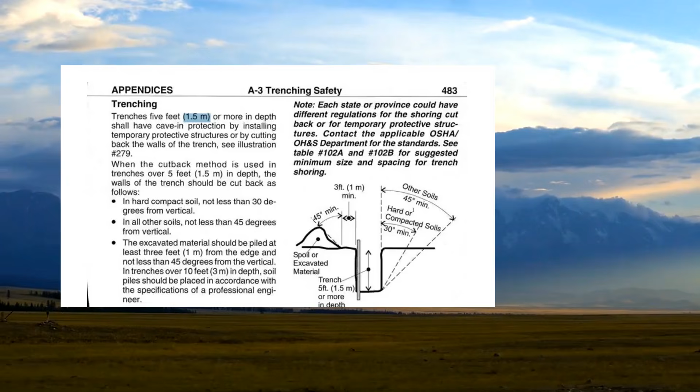Now this isn't exactly accurate. The numbers you need to remember, just like with the ladders, it's 1/4 the height. With the sloping, it's 3 feet out, 4 feet down. So we don't actually use this 5 foot thing.

The whole reason why is because if you think about it, most people in trades are over 5 feet, over 6 feet. So we don't use 5 feet because what would happen if you were standing in that trench and it caved in? That would actually cover your lungs. You wouldn't be able to breathe. So that's why we leave it to 4 feet.

That's it. Yeah, and that way we're for sure going to be able to survive. Right? Yeah, yeah, part. Well, that makes sense.

So remember, it's a 3 to 4. So 3 feet out, 4 feet down. 3 feet out, 4 feet down.

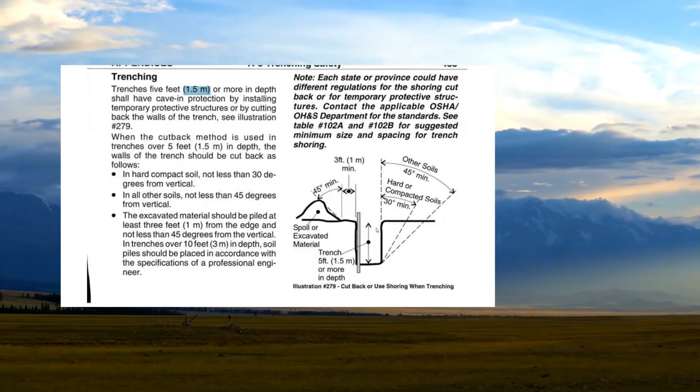A lot of these tables you don't have to really worry about.

Now, confined space entry. That's why this book is so important, is when we're dealing with confined space, what do we have to have? Well, we should have safe work procedures written out that can be checked.

We also have to check the OH&S, occupational health and safety, as to what we have to do. So if we're going into confined space, we might want to take air samples.

And the other thing we want to make sure of too is that we have someone who's an alert person, someone who's standing outside of the confined space who can monitor when you go in it. So that's why that's important.

Now, again, flammable explosive substances. Any time you have a fire, you have to have the proper extinguisher. So most of them are ABC. A for ash, B for oil, C for circuitry. D is the rare one, that's combustible metals. We're not going to typically have those fire extinguishers around because we don't deal with combustible metals like sodium, potassium, things like that.

But we do deal with fuels. We do deal with paper products and cardboard and all sorts of other things. So part of the flammable and explosive substances, like even a B tank.

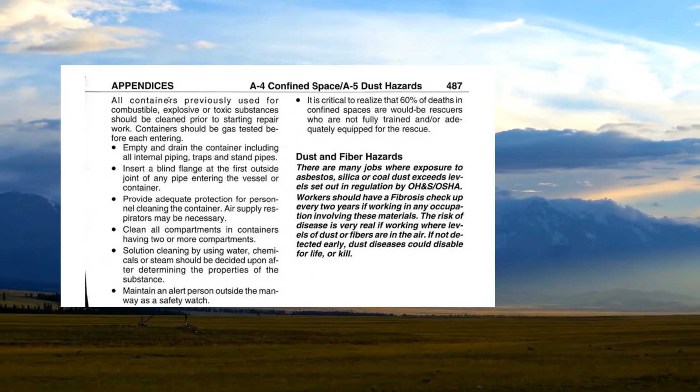And that's why we have to use class E hard hats now too, right? Because they're rated for up to 20,000 volts. So you won't get electrocuted in your head. Which is probably a good thing, right? Yeah, for sure.

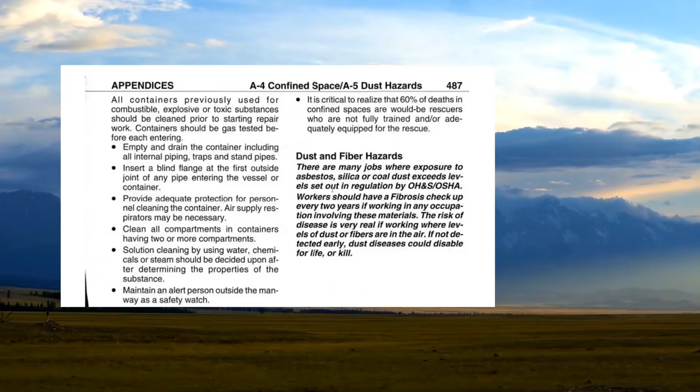Yeah, and then what else are we looking for? Okay, so dust and fiber hazards. We know about that, obviously asbestos, silica, things like that. We need proper respirators. If it ever comes down to it, with the silica dust, a good thing to remember is it's the purple filters, and then you have to get fit tested every year.

Clean shaven or something. I mean, I always hated doing that. Yeah, and then they stick this nasty smoke in your face to make sure it's working.

Even when I first started, silica hazards weren't even a thing back then. I can imagine. So yeah, we used to - all I was told when I first started as a first year was, just breathe out or look away from the dust. That's what I was told. And then I find out, look at it now, 4 or 5 years later, I find out, oh, silica is a serious hazard, right?

Something about not disturbing it was the key. Well, what happens is apparently just like asbestos - asbestos actually digs into your lung tissue and then it sits there because it has basically little barbs, and your body's trying to reject it, but it can't. So what happens is the skin inside your lungs kind of goes over it, and that's why cancer forms.

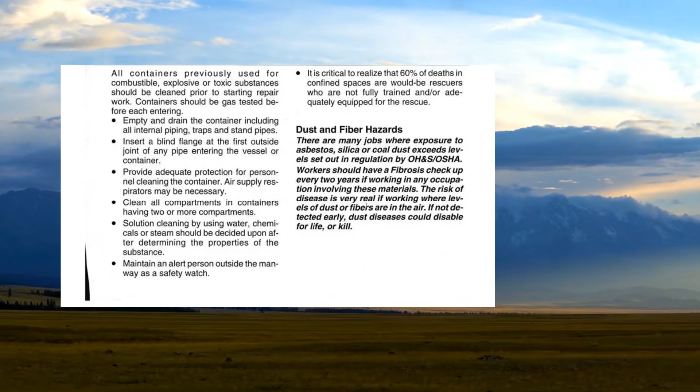Now with silica dust, that's a completely different thing. What happens with that is because it's so fine, it actually sits in your lung tissue, and because your lungs are basically wet, it actually forms a cement. It grows, builds on it, and it builds up over time, right? That's why we have to worry about that. But that's in the OH&S stuff.

Okay, identification of piping systems. This is important too, sort of. Most of the stuff is for industrial applications.

So if we were going to identify a sprinkler pipe, that would be red. If we were going to identify a gas pipe in industrial, that would be yellow. If we were going to identify process water piping, that would be green - so process water would be used to cool equipment, let's say, so it's not potable, but we're just cooling the equipment. And then we have blue pipe, which would be for potable.

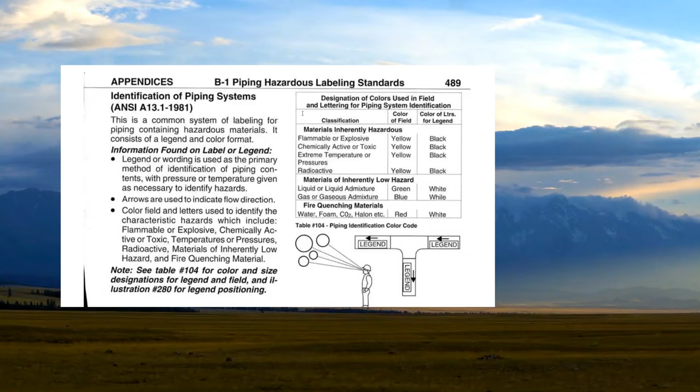So the kinds of things that you might get are going to be in residential. What color is a gas line painted? Yellow - actually, or gray. Gray, yeah, in residential. Yeah, in industrial it'd be painted yellow. That's right. That makes it obvious, right?

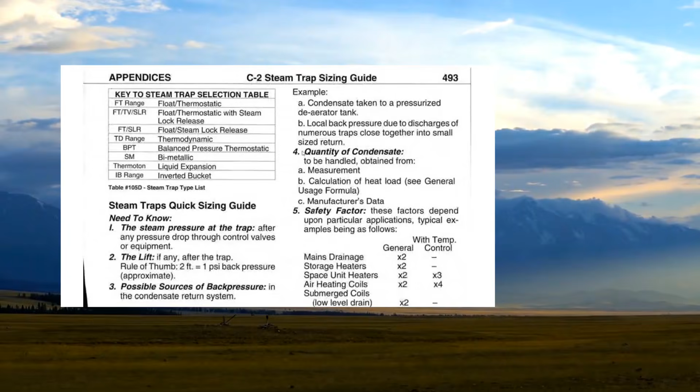What else do we need from this guy? Okay, steam traps - I think they've mostly removed steam from your test.

Now, how are you with this? If I look at it, I remember it, but I always have to come back to it, like weighting and all that stuff. And even some of the conversions, I try to teach my kids that, from Celsius to Fahrenheit and all that.

Right, so this actually uses 9/5 or 5/9, so I wouldn't use those numbers. What I use isn't that - it's 1.8 or something like that? Exactly, yeah, 1.8. So I would do Celsius times 1.8 plus 32 degrees to get Fahrenheit, and for Fahrenheit to Celsius, I would do minus 32 and divide by 1.8, right?

Now, here's the issue too - we always have imperial and we have metric, right? So Fahrenheit would be imperial or US, whatever you want to say, and Celsius would be metric.

When we're doing calculations, like with the combined gas law, we always have to have absolutes - so we always need absolute pressure and absolute temperature, right? So hopefully you don't get any questions like that, but it's easiest.

I remember one or two, and I did study a lot on it because it was interesting to me. Do you remember the formulas? Yeah, okay, so it's V initial P initial divided by T initial, or you can do V1 P1 T1, equals V2 P2 T2, or final - there's a lot of different ways you can say it. But with those, we need absolute pressures and absolute temperatures.

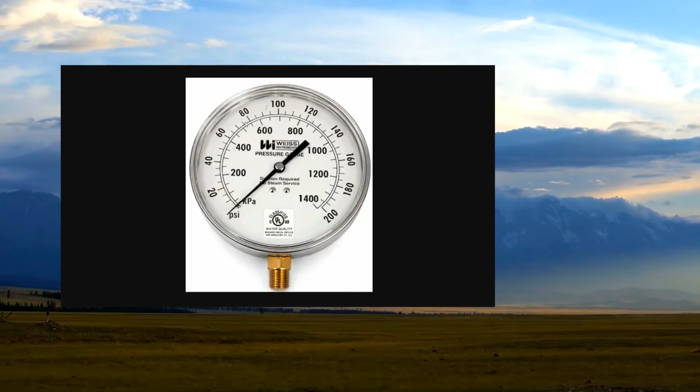Exactly, yeah. So for doing the combined gas laws and things like that, we have to take the gauge pressure and add it to the local atmospheric pressure, and that gives us absolute, because the only way to do that calculation is with absolute pressure. Okay, so that's that plus 14.7.

Right, 14.7, yeah. Now with temperature, Fahrenheit, the absolute for temperature for Fahrenheit is Rankine, and the absolute temperature for Celsius is Kelvin. So the numbers that are important to remember are 460 for Fahrenheit to Rankine, and 273 from Celsius to Kelvin.

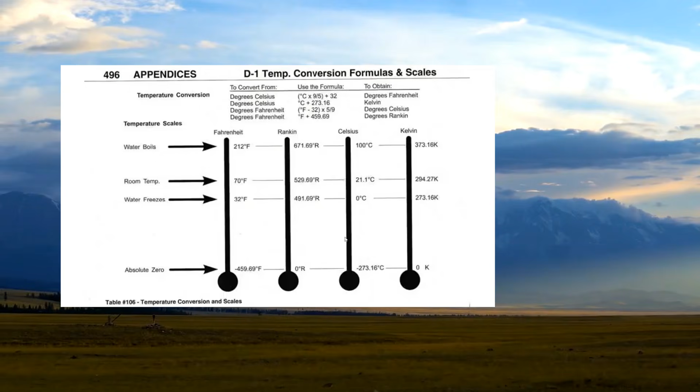Okay. At absolute zero. Right, so if you look down here, Fahrenheit is negative, basically 460 degrees Fahrenheit, but absolute in Rankine is 0. So when we're dealing with temperature, absolute 0 - so even space has energy, right? It has a little bit higher of a temperature than 0, probably, I would say, maybe 20 degrees Rankine, somewhere in there. So it'd be just above absolute 0.

Because the problem is once we get to absolute 0, that means there's no energy in the atoms - they fall apart. So scientists have been able to get it down to about 1/10 of a degree from absolute 0, but never absolute 0, because everything contains energy. Right, right.

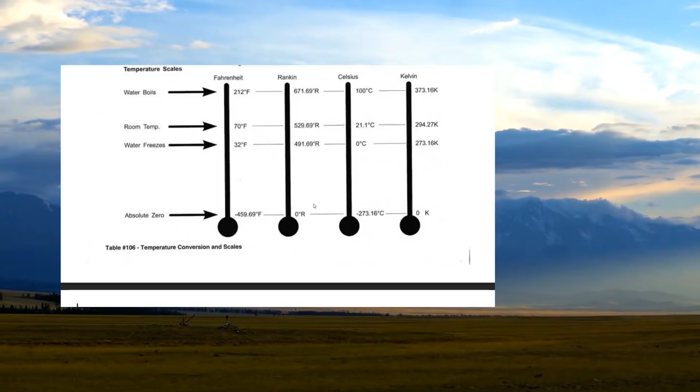So yeah, like I said, the numbers you just need to remember are Fahrenheit to Rankine plus 460, Celsius to Kelvin plus 273. Okay, so yeah, make sure you keep track of that. And again, those are just for combined gas laws calculations.

Hanger spacing - what we want to do is go to 2345 or 2344. So in the code book, 2344 talks about vertical spacing. It's every other floor, maximum 7.5 meters, which is about 25 feet. And then for horizontal piping, we want to do 2345, and then check for the type of piping we're using and figure out our calculations from there.

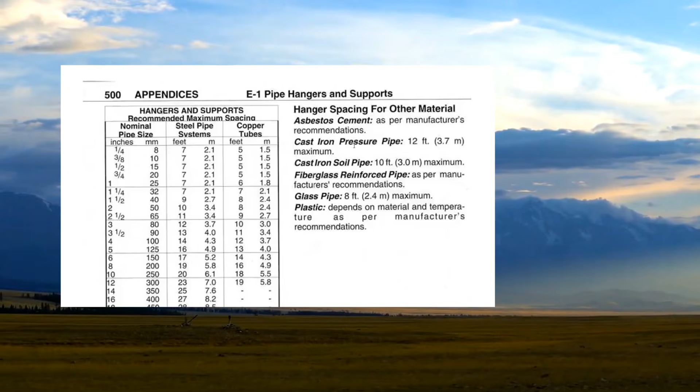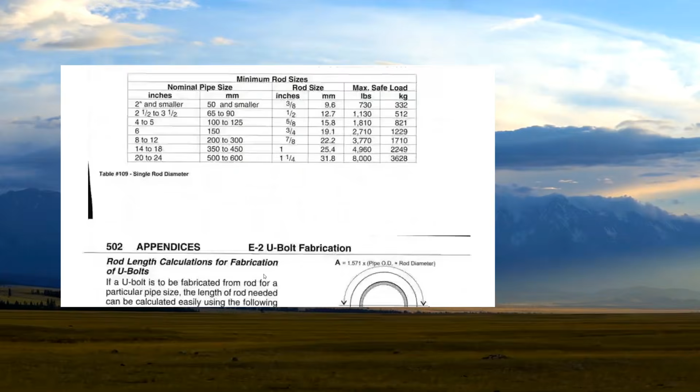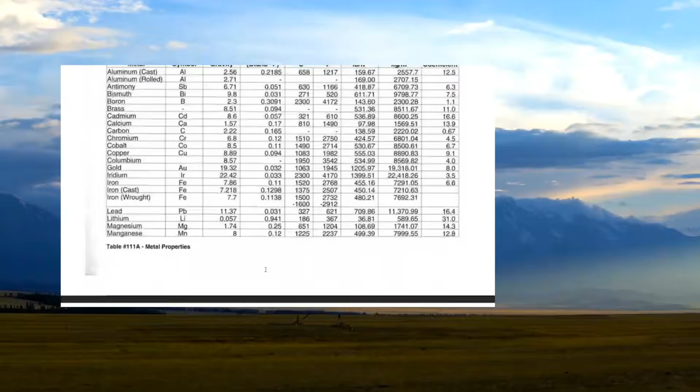Rod diameters, same thing - go to the code book. Don't use this because there's no need to. U-bolts, we don't have to worry about. Tables, we don't have to worry about, because if you're given any tables, it's just going to be a basic thing they ask you.

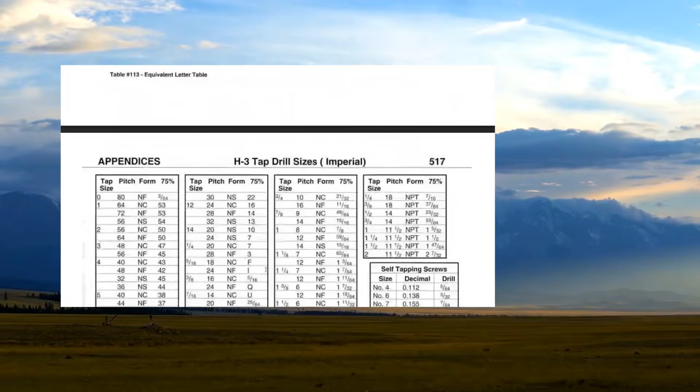Twist drills, no. This is good - okay, so this talks about threads per inch, right, so this is definitely a need to know. So with 1/8 it's 27 threads per inch, quarter to 3/8 is 18 threads per inch, half and 3/4 is 14 threads per inch, 1 to 2 is 11.5, and then 2.5 and above is 8.

Now, what's important about this is the type of questions you're going to get, possibly, are which dies can handle which thread sizes. In other words, the answers are going to be something like: can I go 1/2 to 1.5 inches with the same dies? Can I go 1 inch to 2 inch with the same dies? Can I go 1.5 to 2.5 with the same dies? Or can I go 1/8 to 3/4 with the same dies?

Okay, so obviously, because there's more threads per inch the smaller we get, the right answer for that kind of question would be 1 to 2. We don't have to change the dies. But for other examples, like 1/2 to 1.5 inches, yeah, we'd have to change the dies because they're different threads. Even 1.5 to 2.5, or 1/2 to 2.5, we'd have to change the dies 3 times, so that's not going to be the right answer.

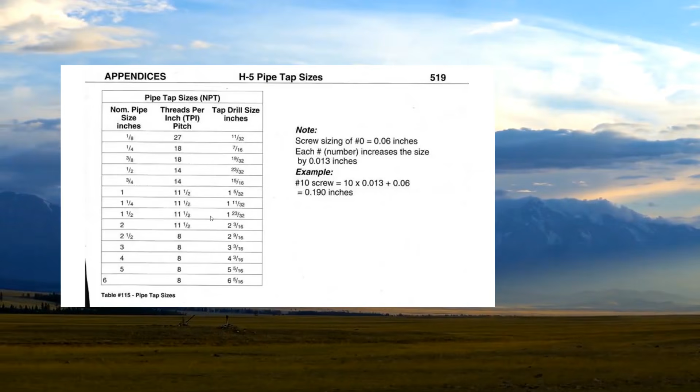That's why this is important, because you may also see a simpler question, like how many threads per inch for a 1.25 inch pipe? 11.5. Right, might also ask you what the thread pitch is. The thread pitch on any standard pipe thread is 60 degrees.

Now here's some good formulas. The ones you want to know how to do would be square, rectangle, circle, cylinder, cube. And that's about it.

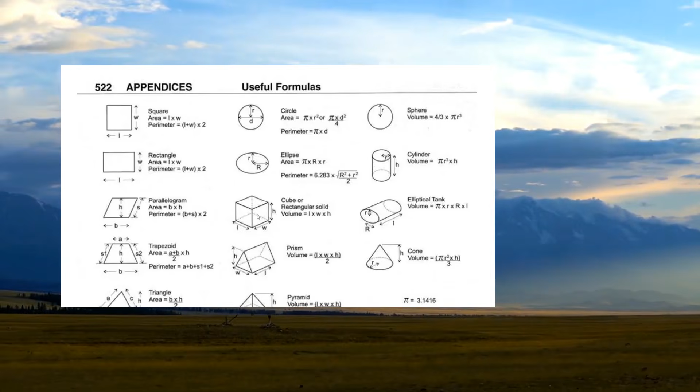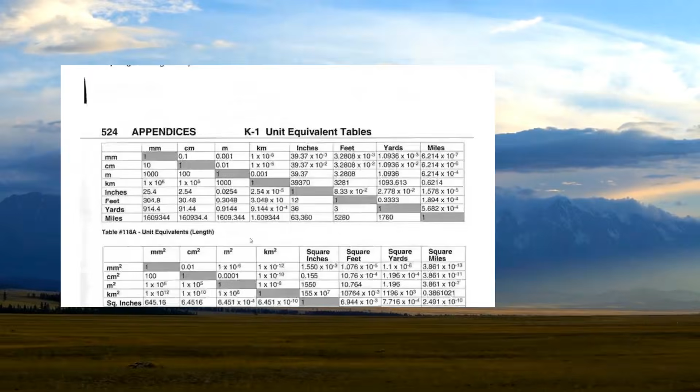Now, with all these tables, the numbers are good to know. So if you go on my formulas page - did you print that off? I could. Yeah, so it's probably a good idea to do that with all the properties of water and all the formulas on there, and then just add to it.

With these tables, they talk about scientific notation, which is what this is - this 10 to the power of 6. All this basically means is we're adding 6 zeros to this number. This one we're adding 5. If it has a minus in front of it, that means we're taking the decimal and moving it 5 spaces to the left, so that's 0.00... so this would be 0.0000254. I think they did that to condense the table a little bit.

But some of the ones you want to know: meters to millimeters, 1,000. Meters to centimeters, 100. The other one I would say is decimeters - how many centimeters per decimeter? Well, if we had meters to decimeters, that would be 10, in between centimeters and meters. So we had decimeter in between - it would be 10 decimeters per meter, 100 centimeters.

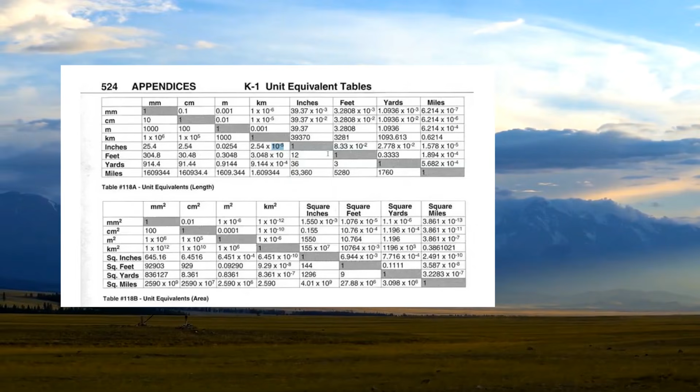So these are good ones - meters, millimeters, meters, centimeters. What else is good? Feet and inches, right? 12 inches per foot. And then when we go to square feet to square inches, what we're doing is, because it's squared, we have that number 2 in the back of it. All you'd have to do is think, okay, that's 2-dimensional. So if 1 foot is 12 inches, 1 foot by 1 foot would be 1 square foot, but 12 times 12 will be 144 square inches. So there's ways you can figure it out.

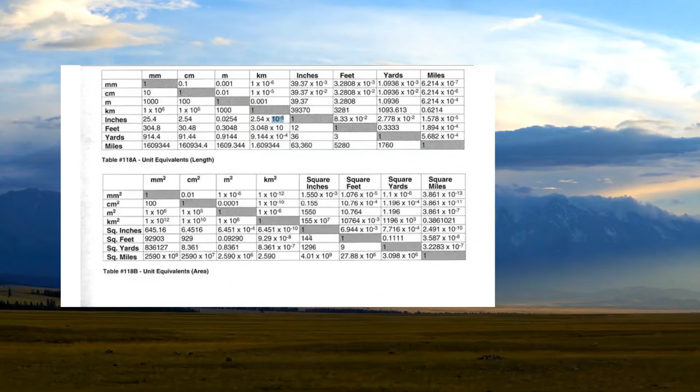And the best thing to do when you're doing conversions like that is draw it - draw the square, draw the cube, draw the line. There's lots of numbers on here, but like I said, I would look at the properties of water and then look at that formulas page, because it has the properties on there too.

And then converting from metric to imperial, it's always a little bit different, a little bit difficult. But if we look here, cubic feet, cubic inches - 1728 cubic inches per cubic foot. So again, draw the cube: 1 foot, 1 foot, 1 foot, 12, 12, 12. So where the 1728 comes from is 12 times 12 times 12.

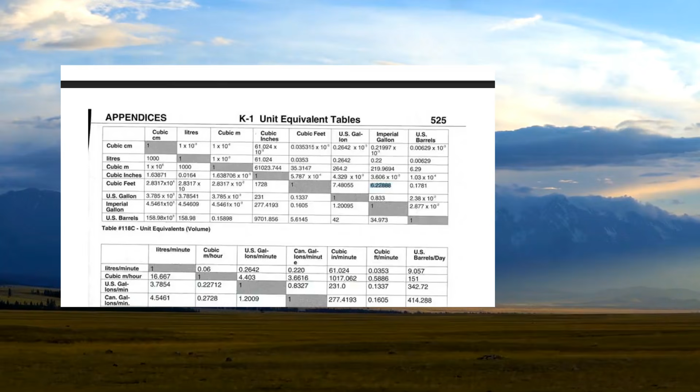And these ones are good too. Now these aren't the exact numbers - they went a whole lot of decimal places past where they needed to. Same with this - so if 1 cubic foot, how many US gallons in a cubic foot? I would just say 7.48, close enough. Imperial gallons per cubic foot, I would say 6.23 or 6.24. So it's things like that you want to pay attention to, and definitely do the numbers.

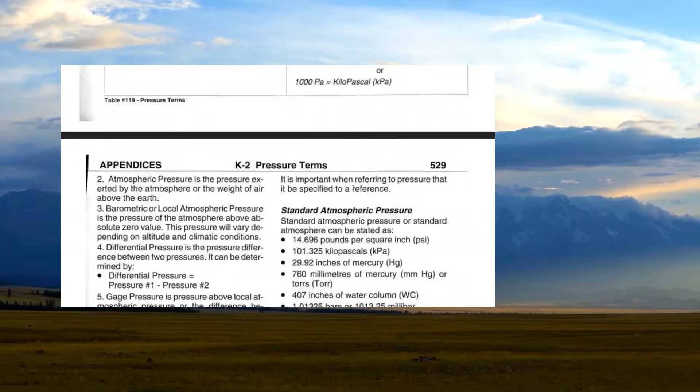Here's the pressure calculations. This is where it talks about standard atmospheric pressure in different units, and this is where we get the 14.7 from. We're just rounding up to the first decimal.

Inches of mercury, I would just round that up to 30. Close enough.

So we have 10 psi gauge pressure, with 10 plus 14.7 - that's right. That's 24.7. There we go.

What's the differential pressure? Good question. Have you ever tested a backflow? No? Did you ever have to do that in school? No. Okay, so what differential pressure is saying is, what is the pressure difference between this pressure and this pressure?

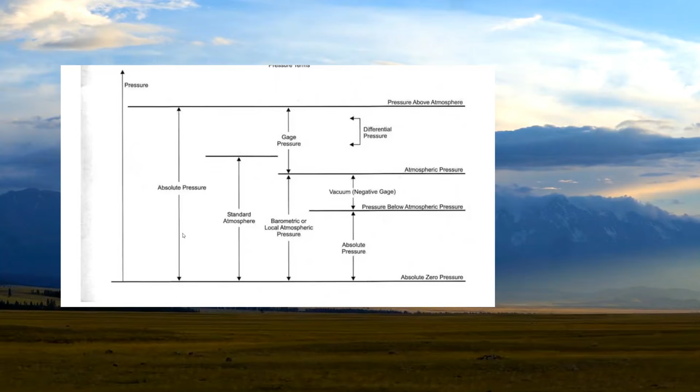So between pressure and atmospheric pressure - if we're just talking gauge pressure, it would just be gauge pressure minus gauge pressure. If we're going absolute, then we'd have to include atmospheric pressure to figure that out. So you could ask, what's the differential? Yeah, exactly.

Okay, so that's how we pressure test backflow preventers. If we're testing across the check valves in a DCVA or an RP, we use a differential pressure gauge. We attach the hoses to the test cocks, and then we read the pressure that's going in and coming out of the check valve.

So then you just calculate the difference. The gauge does it for us. Yeah, so we just read it, make sure it's above a certain point. With check valves, it has to be at least more than 1 psi.

So let's say on the supply we have 100 psi. In the intermediate portion, if we don't have less than 99 psi, then there's a problem - that means that check valve is either fouled or stuck open.

Okay. Works for you? Works for me. Nice.

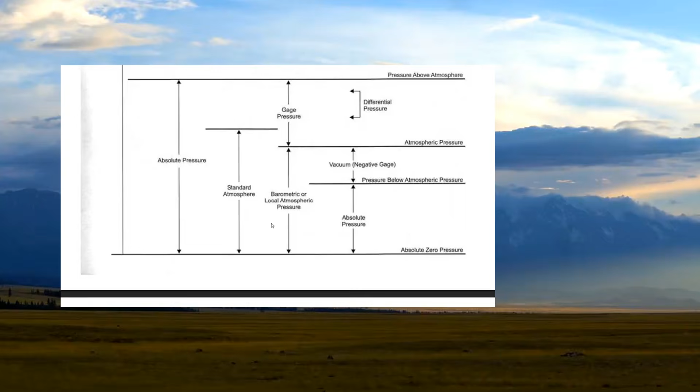Yeah, and we deal a lot with that with our water. That's right. Yeah.

Now, because we're dealing with the plumbing code, obviously it's Canadian, so it's metric. So what it says in there, dealing with plumbing fixtures, is that the maximum you can have to a plumbing fixture is 550 kPa.

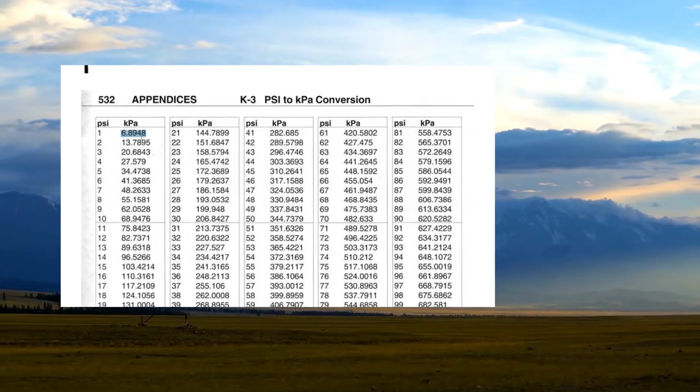So if we were going to convert that to PSI, what do you think we would do? Divide it by that - 6.895. Exactly right. Yeah, just that simple.

I just always remember some kPa like that - 9.81 for pressure, for water pressure. And what's that for? I believe that was for calculating elevation. That's right, good.

Yeah, so it's 9.81 kPa per meter. Right, and that's how you do that.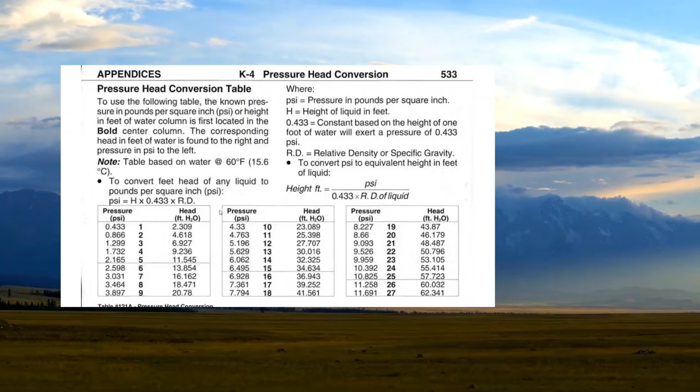Here are your other two numbers: 0.433 psi per foot, or 2.31 feet per psi.

Okay, so here it gives us a formula - the height in feet equals the pressure divided by 0.433, which is psi per foot, times the relative density of the liquid. Obviously water is 1, so we just multiply it by 1.

Which is why we don't even consider it. But if we're dealing with gas, which is obviously less dense than water, then we have to put the relative density of the gas in the equation too, to get the pressure at the base.

Yeah, I don't ever remember seeing that much of that formula. In your test, you do have to do these kinds of calculations. Yeah.

So I'm just trying to think of other formulas, like for probably hydronics or something else. Well, with those, typically what they do is give you the formula sheets for them. So you might get an air conditioner question where it says calculate how many tons of AC we need, or a hydronics question where it says turn BTUs into flow rate and GPM. Right, most of those, they're at least going to give you something for it.

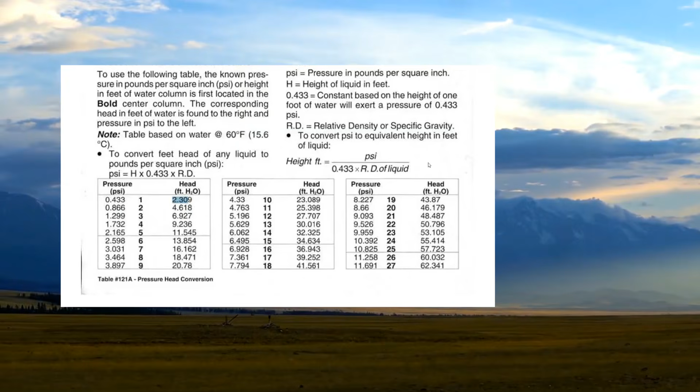But we'll definitely have the opportunity to go through that. Yeah, for sure. Okay. And that's it for that guy. Yeah. It's not too bad, is it? Nope.

I'm doing welding right now, and I was just like, oh my God. What's wrong with welding? Oh, I should have been a welder.

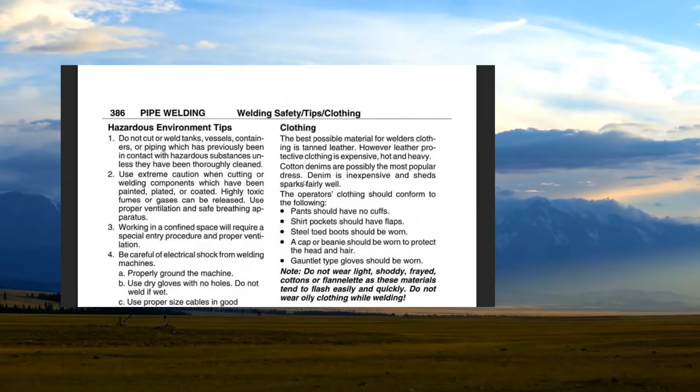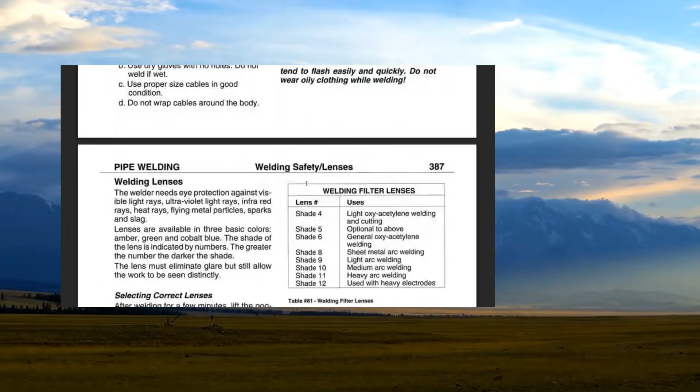Welding isn't bad. I've never done it, even though my old man apparently was a welder. I've talked to him maybe 3 times in my life. He was a welder back in the 60s and 70s, and back then safety wasn't a thing like it is now. The book has increased by like 5 pages, I think.

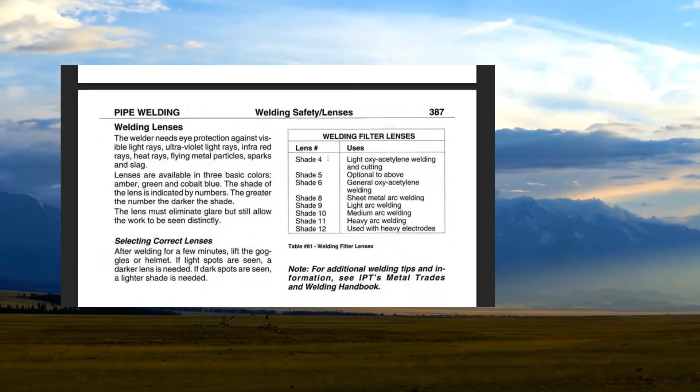This is the kind of stuff you want to pay attention to: shade numbers. Not remembering the exact number, more understanding that the lower the number, the lighter it is, and the higher the number, the heavier the shade. There was a solar eclipse here about 10-12 years ago, and I was in school at the time, in level 2. We actually took welding goggles so we could look right at the sun. It was pretty cool.

Stuff like that. Ventilation obviously is important, how you connect oxygen and acetylene cylinders is important, what the maximum pressure for acetylene is also important, and the connection type for the regulators is also important.

If you see a notch in the nut for an acetylene regulator, what does that tell you? It's just a line notched into the nut. I'll show you, one second.

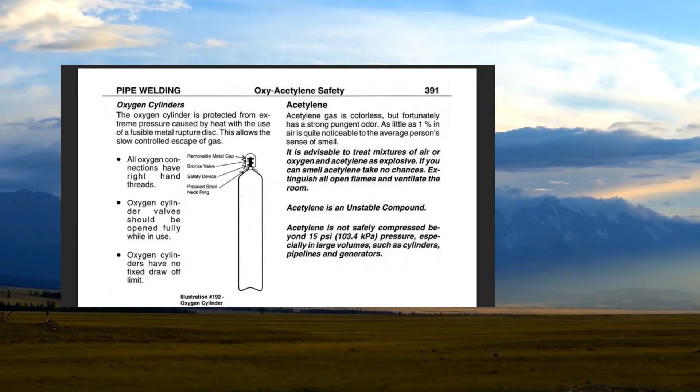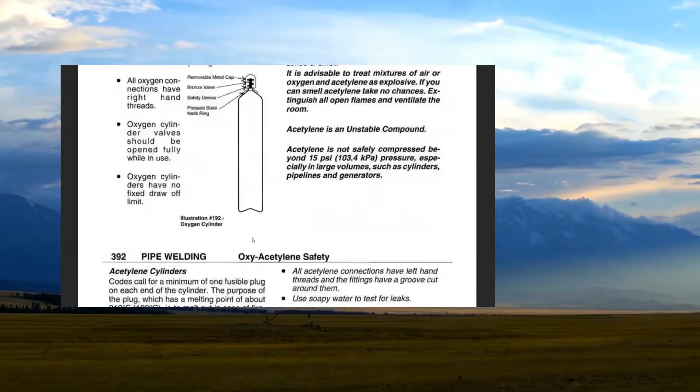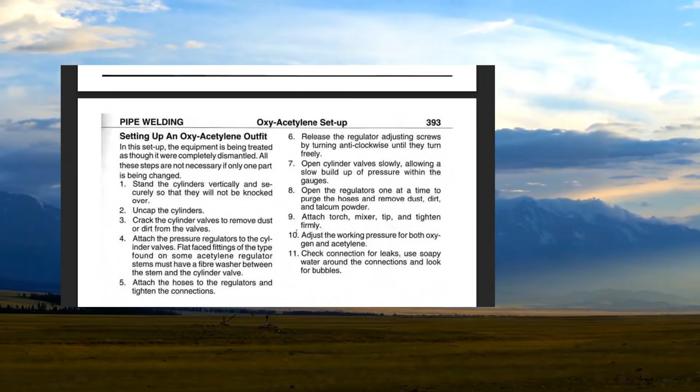Then procedures. Do you remember what I told you with procedures? They probably throw you somewhere in the middle and have you try to figure out the steps. Exactly, even though this is 11 steps for setting it up, in the answers they may only give you 4 or 5. That's why it's a good idea to write this out on your own, in your own words, so you understand what the proper procedures are. Just go through it.

Also simple things like, what color are the hoses? Red for acetylene and green for oxygen.

If I ask you a question about how do we transport cylinders, what do we have to do? Off the top of my head, you have to strap them down. I think the cover needs to be on the cap. Exactly, so that's the type of questions you're going to get, a variety of different questions like that. Like how do we secure cylinders - we strap them down. If we're transporting them, we have to cap them and strap them down.

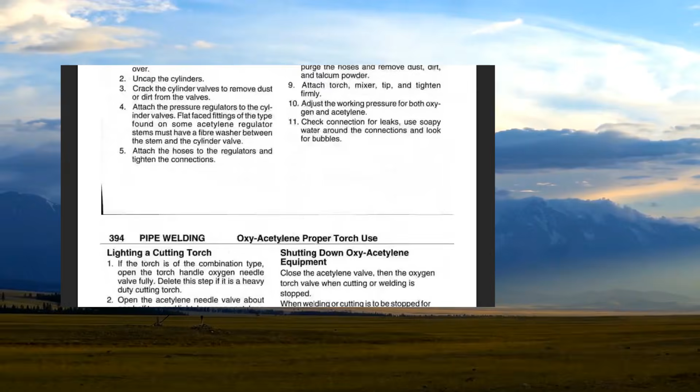But the procedures you definitely want to write out on your own. Same thing with lighting a torch, shutting down the oxyacetylene equipment, and balancing - all you really need to know about that is the different types of flames you could get.

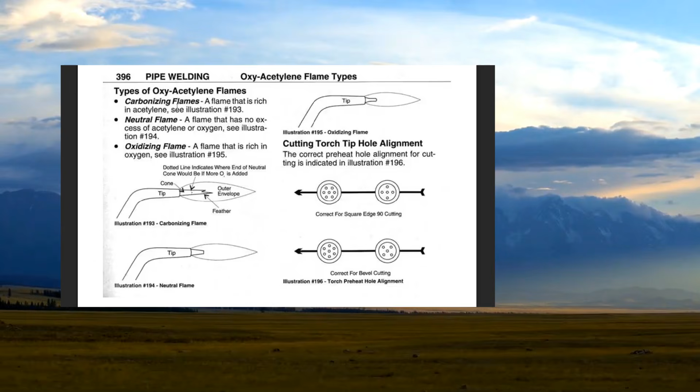Like the tip, like the ends there in that picture - the flame types. So if there's too much acetylene, what do we have? We have a carbonizing flame. At a proper mix ratio, you'd have a neutral flame. And if we have too much oxygen, we have an oxidizing flame. It's just simple things like that.

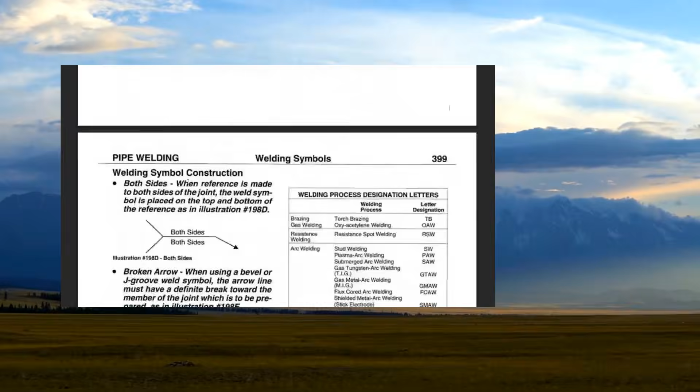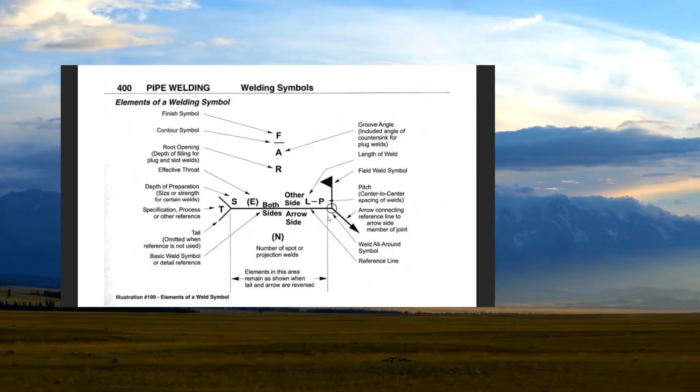Could have been a welder, yeah.

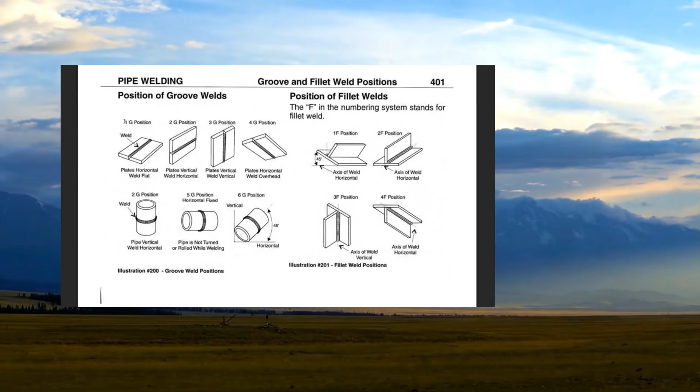Positions, that's important. You may get a question where it has the number, like an E6012 rod. What position can I weld that in? That would be all positions, because the third number is 1. So the third number on that labeling is telling you the position of the weld.

The first two numbers talk about the tensile strength. So if we have an E7018, that would mean the weld can handle 70,000 PSI. What positions? Well, it's a 70-18, so that means I can weld it in all positions, because I have number 1. So that's definitely something to remember.

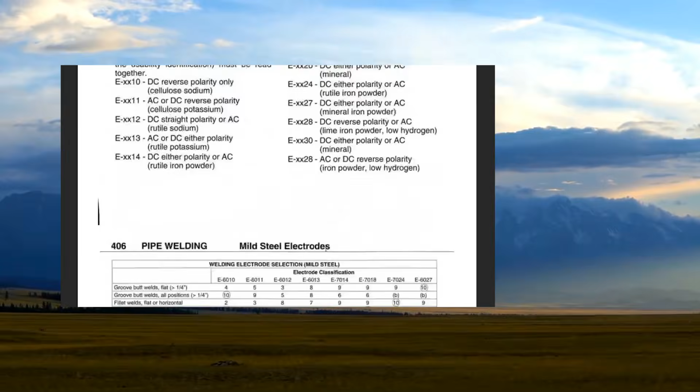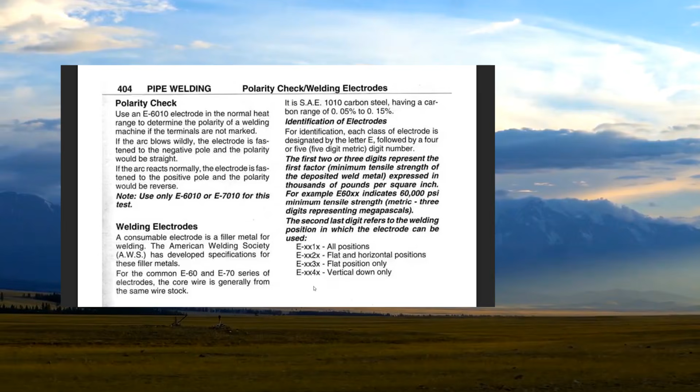The other thing you want to remember is which rods need to be kept in an oven. Whatever answer says something to the effect of low hydrogen, that's the one you pick. I believe those are the E70-18s. The 8 at the end means something else, like polarity, or it could indicate use or what type of system. But the ones you definitely want to know are the first two numbers and then the third one. And the ones you need to keep in an oven would be low hydrogen.

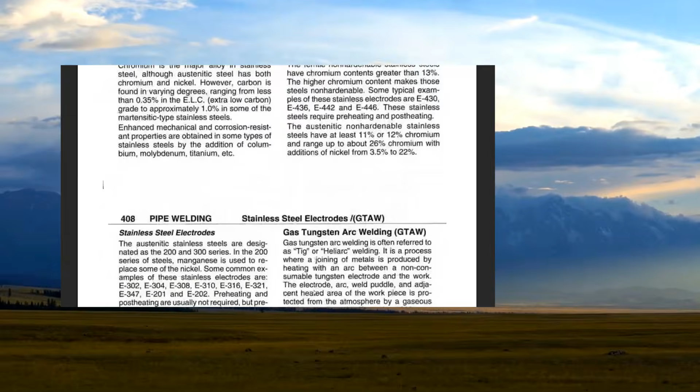So yeah, the first two is the tensile strength, the third one is the positioning, and the last one is whatever.

That would be low hydrogen, you want to keep in an oven. Make sure it stays dry so the coating doesn't come off. You need that coating to maintain sort of an oxygen-free environment when you're welding.

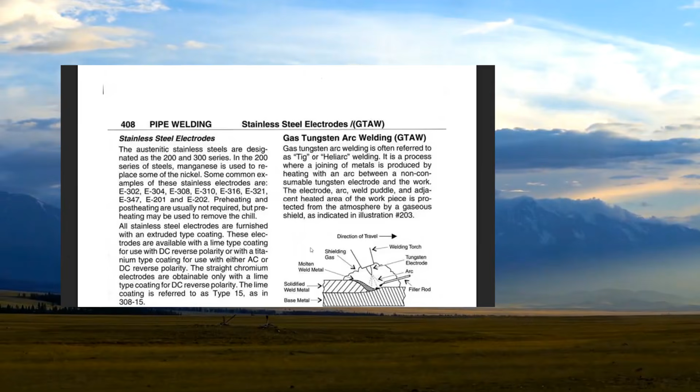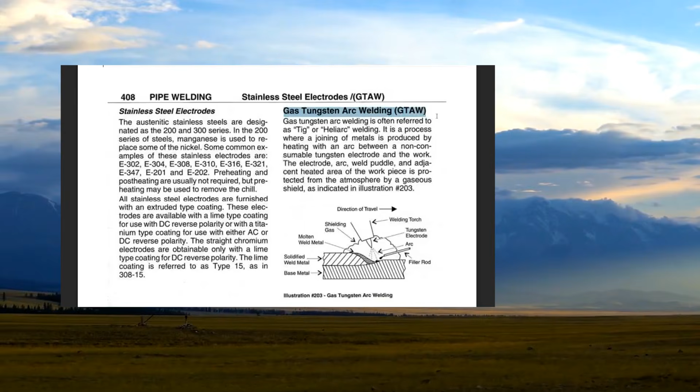You may see something to the effect of what welding process would be used for stainless steel pipe. That would be gas tungsten arc welding, GTAW. And then it walks you through how it works, which is fine.

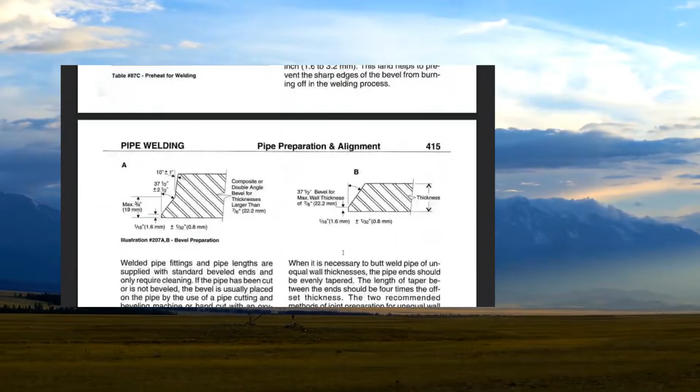This is good right here. Pipe prep. If you're ever on the job working with a welder, and he says, grind the bevel and leave me a land, the land refers to the straight portion on the edge of it. The welding bevel you want to remember is 37.5 degrees, with either a 1/16 to 1/8 land.

What's the example? If you're ever working with a welder—I've worked up north, like in the Yukon, and we were doing process piping for a mill building. They were extracting gold and platinum and all sorts of other things. Working with a welder, I had to bevel the pipe so I could just give it to him and then he could weld it.

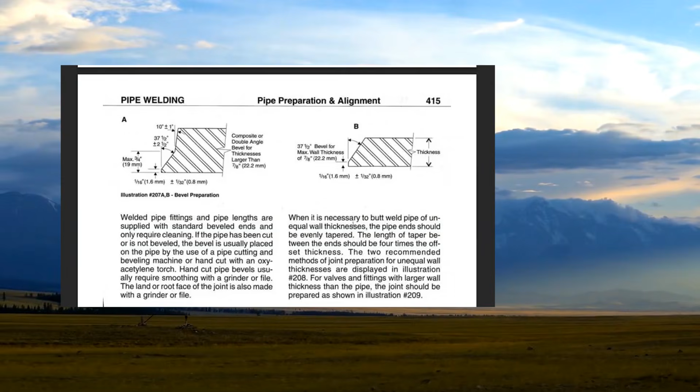He wasn't as picky as that. He said to me, 45 works, whatever, but just make sure I have a 1/16 to 1/8 land, which is the straight portion, so he could do his fit up. I'm like, okay, sure. But this would be strict if it comes to a test. So just remember, welding bevel, 37.5 degrees. And then the rest of the stuff, I wouldn't worry too much about.

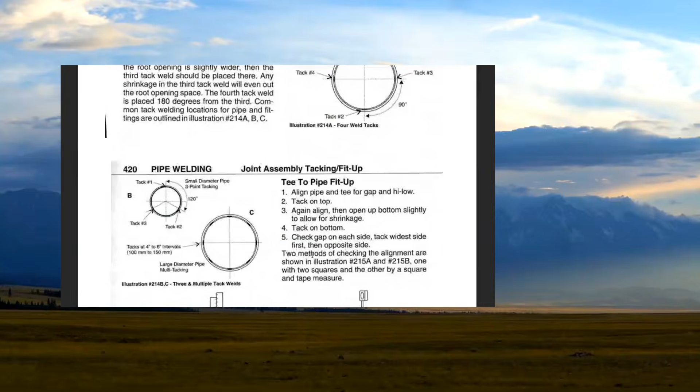How many tacks do you need? Four. Very simple. What would you use to line up pipes? A square.

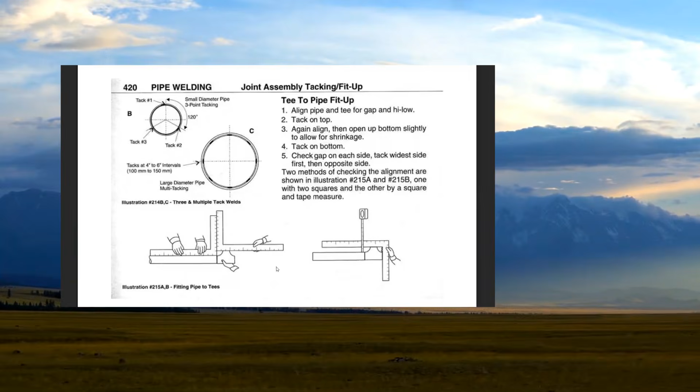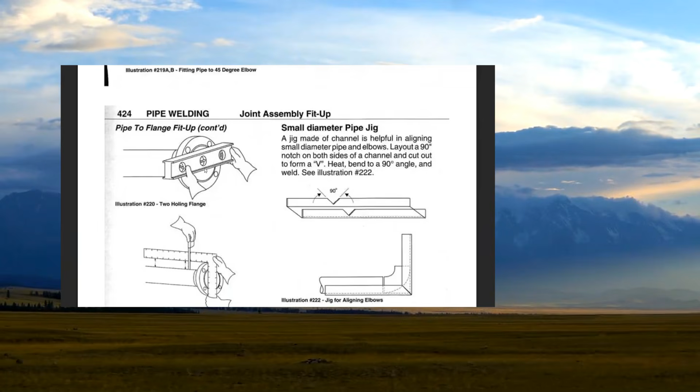This is important: with flanges, we never want one hole on the top. It's always two holes, exactly for this reason, so we can level off the flange. And then what we want to do is use a square, measure off the pipe to make sure that it's actually angularly proper.